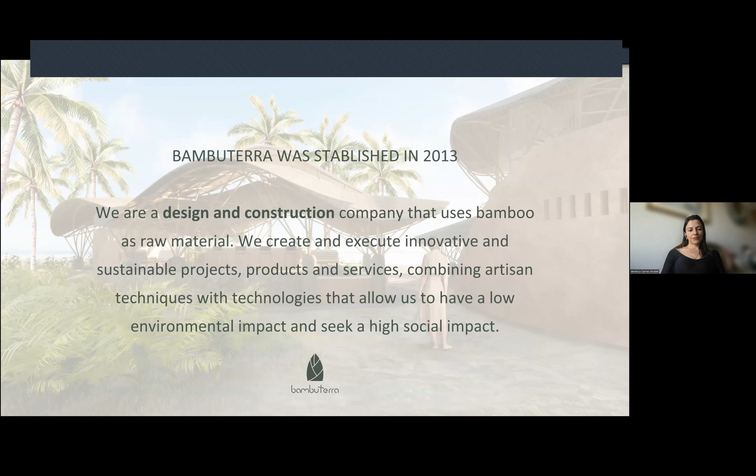So I'm going to show you the result of my experience. We've imagined bamboo culms as systems that can lead to construction and avoid the excessive use of other techniques. So this project introduced us to this.

So we produced this for a festival, and this is basically what we do. We combine architecture and engineering, and we develop blueprints that allow us to design tailor-made connections that also help us with the building process.

This also came from a static idea that was a beautiful one, using bamboo culms in the city of Mexico, where it was built. For this, we had to create some special joints that, based on our practice and on general engineering information, we needed to survey, test, and produce precise engineering for. But of course, this is part of the work we do.

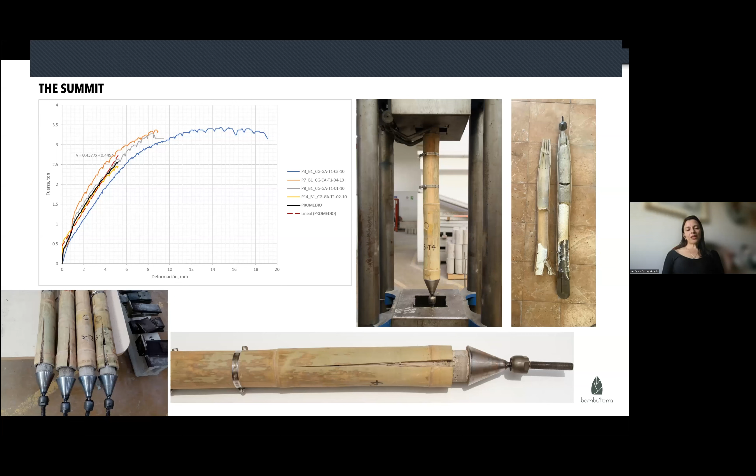And this is applicable for the business world, where most of the things we can see are conventional materials. This also fed our experience, where many culms were required in order to develop this project in a short time, and this also helped us with the assembly. This is a very architectural use, but one that also helped us being trained in the logistics of pre-manufacturing.

Another project that was very challenging for us also had an architectural use, but used a lot of bamboo in order to create this prefabricated plywood that covered over 6,400 meters of interior lining with this coverage.

So we've also worked with housing solutions. This has been done from social housing to residential housing, and we've used prefabricated systems for this as well.

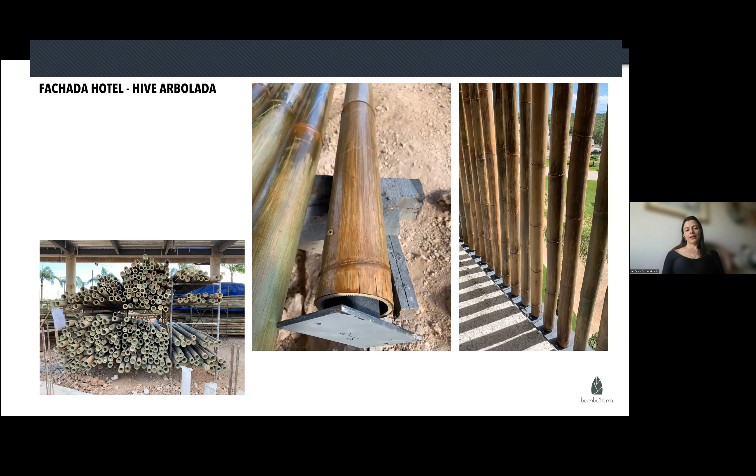This is just another example of one of the products that we are selling. These are the geodesic domes. This is done with bamboo, and this has some metal ends, and this enables us to generate some very effective solutions from a perspective of business processes.

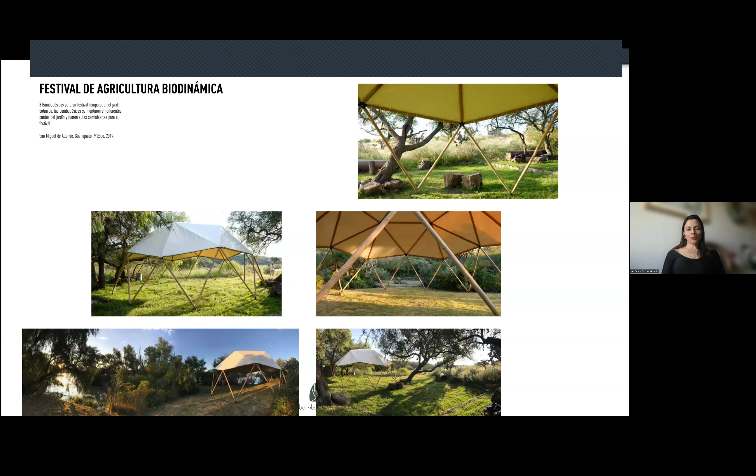And these are some of the processes that we have currently in place. This has been done with scale models. These are some bigger projects. We have evolved with time until we have been able to manufacture these concepts and projects for Mexico, but also for the rest of the world. We believe that this is some of the experience that we've had so far.

I would like now to get into the matter and share a specific project with you. This is a place that was built, a fairground that is currently being built in the city of Chilpancingo, which is the capital of the Guerrero state of Mexico.

So this project is part of a national project for the renewal of public spaces in this country. So far there have been over 1,000 projects, a lot of money has been invested, and 4 of these projects have bamboo. 3 of them have been successful, 1 of them was not, unfortunately.

Why wasn't this one successful? Well, the reason why, and something that's also worth mentioning, is to understand that some bamboo projects are successful while others are not. This was only based on prices, so there were different possibilities for obtaining providers, but we decided to go with the cheapest, and very frequently the cheapest is not the best. The consequences of this led to very poor material, and before the opening of the construction, this material was plagued with insects, and all of it had to be renewed and replaced.

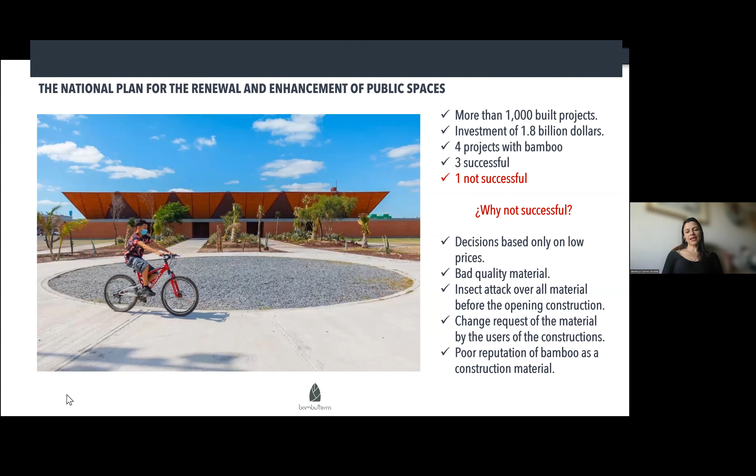This is Palenque, where traditionally cockfighting takes place. We have these 2 pavilions built of bamboo, and I will go in depth about them. These are 2 identical structures. This is the theater of the village, where different plays are shown, and these are also made of bamboo.

There's a combination in Palenque, and here we can see the galerías. These are all galleries, the eastern one and the western one, and they are also built with bamboo. But there are other buildings - this one is a structure that is not made out of bamboo. However, the majority of the new ones include bamboo.

This is about 8,400 meters of construction. This is a diagram of the project. The project was developed by a highly regarded institution in Mexico called MMX.

The structural project for the buildings shown in green, blue, orange, and red was developed by Calta Ingeniería, which is the office that I lead. And the building project for bamboo was developed by Bambuterra and is currently also being executed by Bambuterra. The general management is in charge of the company that won the bidding contest, which is called ABA Gerencia de Proyectos. So let me set the context.

I would like to show you the city of Chilpancingo. From a seismic perspective, this strip in orange is the most seismically active strip of the country. This is an area where the tectonic plates meet and go into the ocean. Thus, this is all highly seismic - we are in one of the most actively seismic areas of the country.

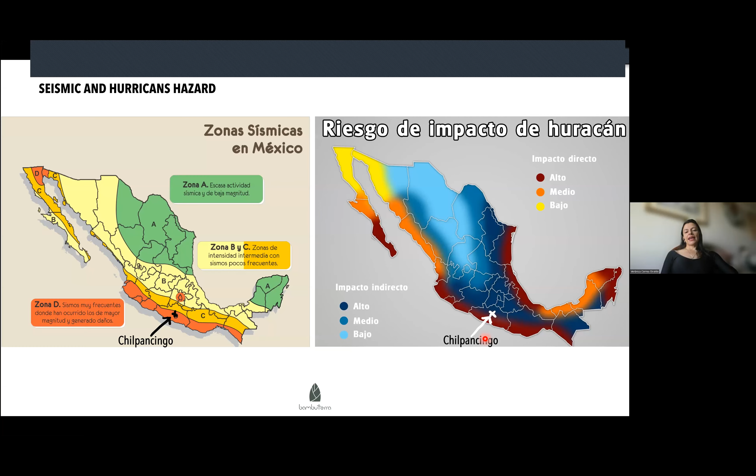There are about 30 very high quality producers that distribute all along the country. Based on the calculations made, we've estimated that there is around 1 million culms per year. So this is the level of supply that we can expect.

Historically, bamboo has been widely used in Mexico. We can see this in vernacular architecture and also in historical documents.

Some of the major challenges that bamboo construction faces in Mexico is about convincing the system. By the system, I'm speaking about the political system. In this case, we're talking about this project, which is made with local resources. So there were 5 aspects that were considered for this project to be developed at this moment.

The first thing that we took into consideration is that we have some prior successful projects of the construction of bamboo. This is also a consequence of everything good that has been done with bamboo around the world. Also, the openness of local Mexican architects who now believe that it's feasible to build large-scale projects with bamboo.

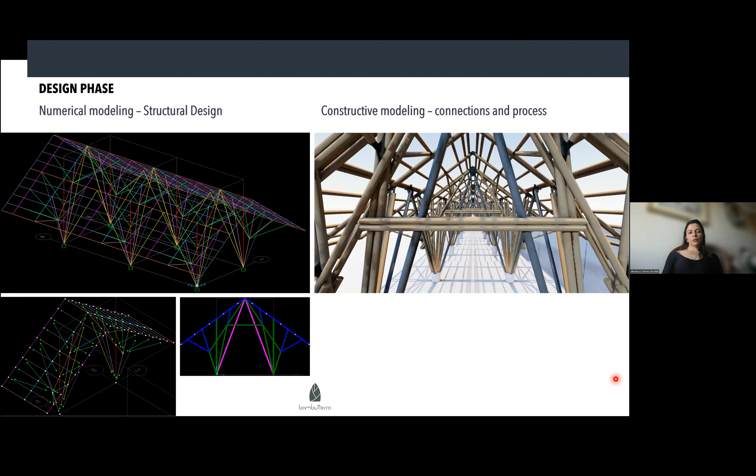Therefore, these structures need to enable, in the case of any natural event, the possibility of serving as refuge for the affected population. We needed to be very careful and include capacity curves for our joints, and through these get direct data about the proposal for the connections or joints we were using in this case.

These are some examples. Let me show you a quick video that showcases the evolution. We can see the single tension test, which was of course carried out in a lab environment. Let me continue.

Let me show you the structures, the pavilions that have an area adding up to about 3,000 square meters. The construction time was 6 months, and they were already built and delivered.

The first thing we did was manufacturing the main structures. Basically, this is what the building process looked like.

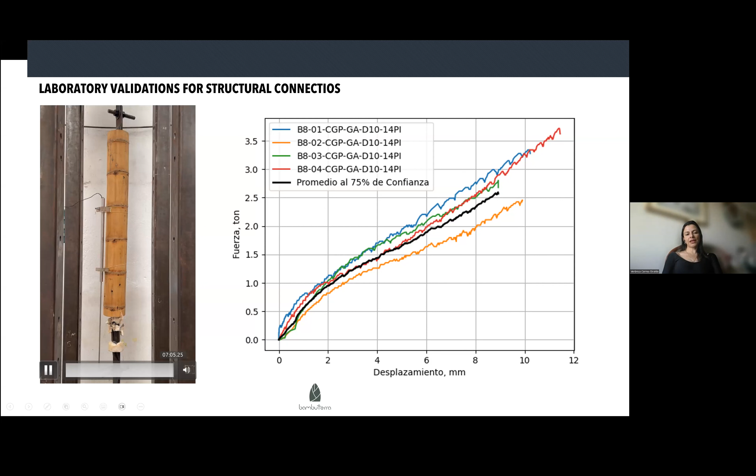After that, we installed the main structures. We started with columns, which were prefabricated as mentioned before, then assembled these frames using a very simple scaffolding system and some specific systems with simple pulleys.

Of course, if this had been built with steel tubes, the building process wouldn't have been as easy or as economical.

Further on, we were able to install these complementary elements to enable this possibility, and we were able to create a very efficient system.

But during the building process, since we didn't have any intermediate columns, we did have some effects of instability, which we were able to counteract because of the construction strategy that we developed.

As part of this construction strategy, we also included some steel elements. However, they were minimal, but they enabled us to stabilize the building process of the bamboo structure, found in almost all the ends and joints.

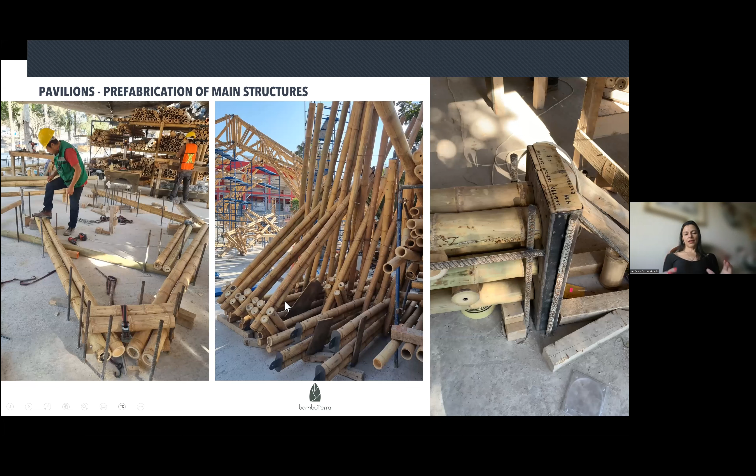But of course, when triangulating and closing all this triangulation, this becomes a very efficient system. We used these two bamboo beams that led to a very proper contribution to the structural performance of these pavilions.

This is a view from the inside. This is a construction model, and this is how it was finally achieved.

So basically, this is what we designed, and what we thought, what we designed was what we built at the end. So we were able to make it.

These are some details about the joints. We can see zooming into some of the important structural joints used in this case.

And this is the finishing phase where we added the details. Of course, in this case, we can no longer see the part before, but we wanted to ensure proper durability during the lifetime of the structure.

The galleries are about 3,000 square meters long. The construction time is 5 months, and we've currently progressed 30%.

We've done a lot of work with the prefabrication of the main structures, and we also used joints that include metal ends, which very easily help us with the construction system.

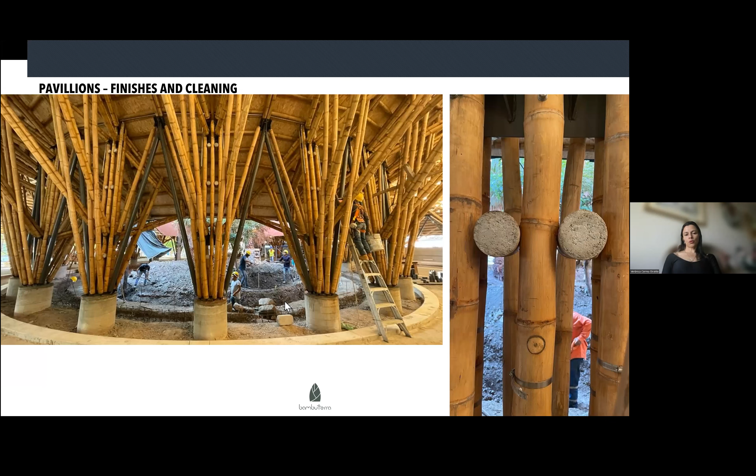And these are processes that make the construction a very long and slow process.

This is how we installed the main structures. Here you can see that we have already mounted the main parts, and this is the current status of the western gallery of this project, and this is where we are now.

So I would like to show you now.

As of course this isn't fully built at the moment, we are waiting for this to arrive. This is where we want to be.

So this is a very long gallery, but of course we've divided it into more modules. And through this, we are able to have better isolation of the structure of this very, very long structure in order to control the lateral deformations that may come up and make building processes much simpler.

And of course, following the topography of the site, which has a certain slope, we use the stairs in order to solve this issue. So these are some of the details related to the joints. They are very precisely modeled.

And as I said before, this building model enables the creation of workshop blueprints that have enough detail in order to pre-manufacture and assemble this in a most efficient way. This includes some steel elements that enable the control of the seismic force.

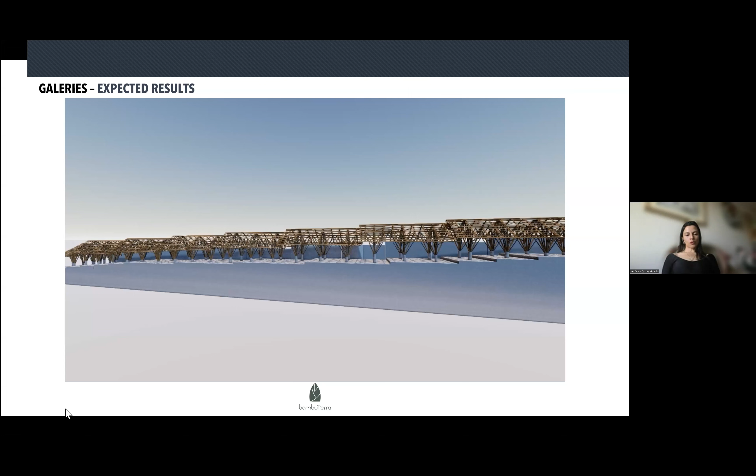And as I said before, we are talking about one of the most seismically active regions of the country. We expect the gravity force, but horizontally, this is part of the seismic forces that affect constructions on this side.

So if you ever go there, you'll be able to see how this looks. If you visit it, this is how you'll see it. This is the structural construction model. There's no architectural ambientation in this case because its goal is to solve the issues related to the processes.

This is Palenque, and this is a hybrid construction made of bamboo and steel. Its area is about 1,600 meters, and it's 50% completed so far.

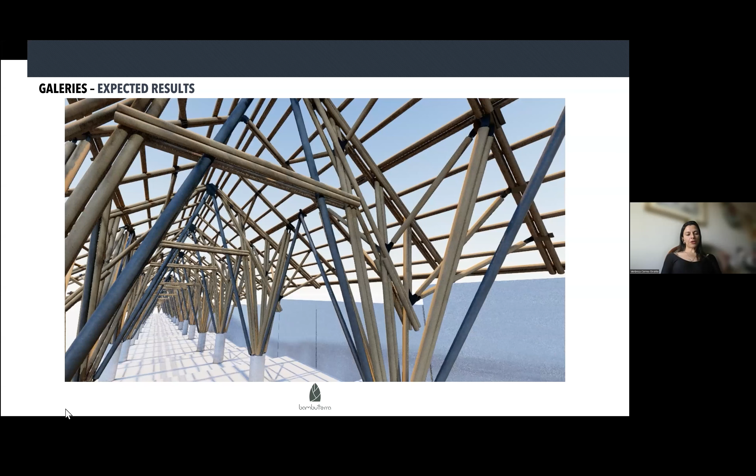So in this case, we combined bamboo and steel, as I said before, and because of this, we were able to reduce the number of columns required for the upper chords of the main frames. We're speaking about 25-meter frames, located in a compression ring towards the inner side, creating a clear space without intermediate support of about 50 meters.

And of course here, you can see some of the tubes we use. They are about 10 centimeters width, and they also use bamboo culms that are between 11 and 12 centimeters. The diagonals are also made out of bamboo.

Here on the inside, you can see how the bull ring looks like. This is safekeeping all the frames. There are 22 frames that make up the main system.

And I would also like to show you at this moment a picture of the construction model, just so you can better understand what we are trying to achieve in this case.

So the main system is made out of tubes of steel, and they have hybrid frames of bamboo that also use steel elements connected to each other. And then all these frames are found in the middle.

As I mentioned before, these are some of the details of the construction of the steel structure. Let me skip ahead just so you can take a look at the bamboo structure we used. So of course, this is the frame which was divided into two sections.

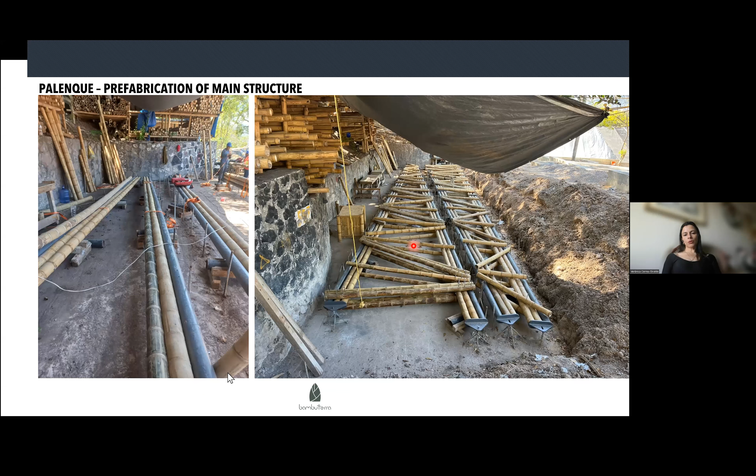You'll be able to find that this is the connection between both frames. Why did we divide them? Well, this is part of the construction procedure that we use in order to avoid having other kinds of structures.

Each one of these frames weighs around 1 ton, and the assembly process will need a tower crane that will allow the hoisting of these frames in order to make this happen, as we can see it on screen now.

I didn't say this before, but the two other structures are lined with mud, and this has been made with plywood. In this case, the lining is lighter, and it uses some prefabricated panels. They have been lightened too, and they facilitate the assembly process because they're panels, of course, as you know.

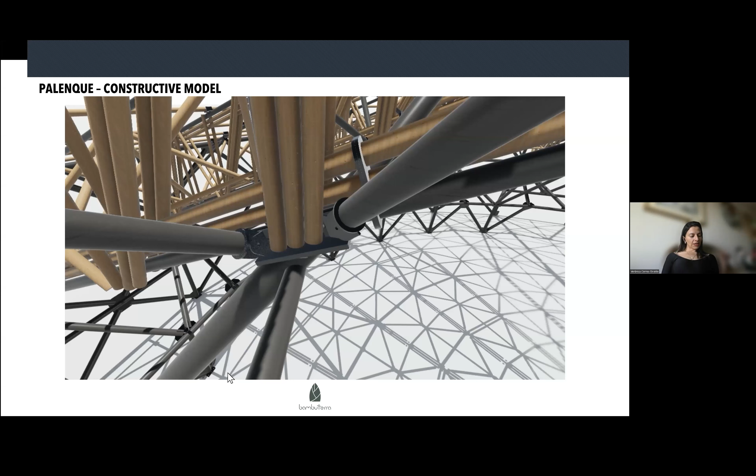So these are some of the details of the connections. So these are the prefabricated panels, as I mentioned before. So this is the inside of the structure. We are talking about 50 meters of a structure, and this is what we can see.

So this is the theater. This is the smallest structure, but this is also the most complex one. If you take a look, you can see the curved elements, but this was part of the architecture conception that we transformed into straight elements because of the urgent needs for the delivery of this work.

Now we are currently prefabricating this. This is one of the workshops where we've prefabricated this, and this is where we are adding some of the elements. And of course, we can see the construction model of the theater.

And as you can see, there are no longer any curved elements. Everything is straight in this case. And you can also see the integration of some tubes made out of steel, in order to comply with the needs, specifically from a seismic perspective for this structure.

This is the most asymmetric of them all, and it also has a lining made out of shingles. This is a very heavy lining or cover, so it does require more complementary elements.

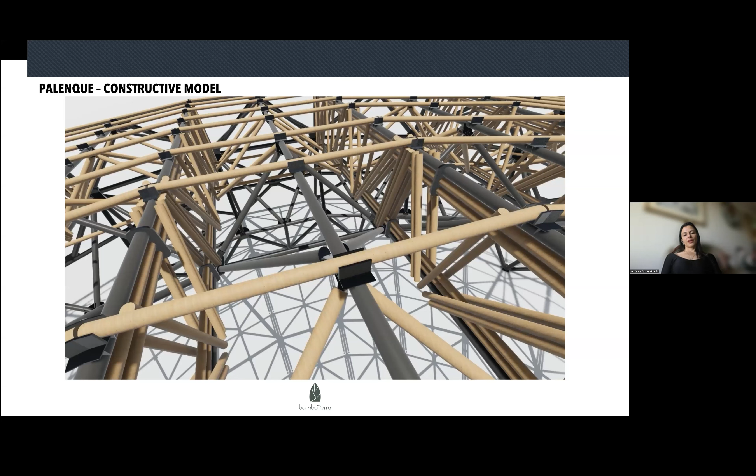In addition, all the cuts in this structure are straight, and this facilitates the building process for us. This is the smallest structure of all, with 600 square meters of covered area. These are some of the indicators and results of the work we've done. The carbon footprint is very low versus other projects made with commercially available materials, and we've achieved strong social impact from a quality perspective.

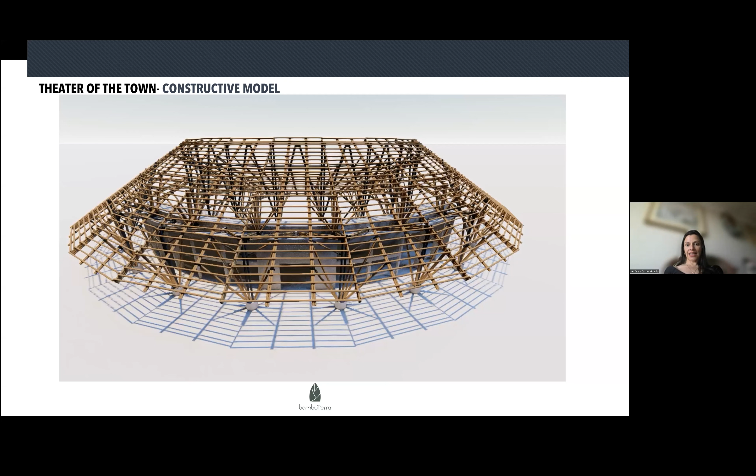We've had the specialization of dedicated labor. Currently we have leaders and builders who are now specialized in bamboo construction. Some of these workers have been with us for many years, others have worked with colleagues on projects of this size, and they've had between 6 and 7 years of experience building with bamboo. But we've also trained around 60 people who didn't have any prior experience with bamboo building, and now they have this experience. This represents a lot of progress for the bamboo building sector in Mexico.

We've acquired around 15,000 culms in Mexico from over 10 producers, and we've created technical documents focused on the creation of this. We're also going to write 2 articles related to the connections for seismic applications. We have a training plan for students and professionals based on guided visits and techniques, which we've done with universities, including engineers, architects, and the construction guild. This will help a lot of people understand the construction process leading to the final result. We're also writing a book and a documentary course to complement and foster the information created on this project.

On behalf of Bambuterra, I would like to deeply thank the team that has directly participated with us on this project, including the design team and the labor team, but also the guild, all the people who work with bamboo, because of whom we have a greater background in the world. Without this information, this process wouldn't have happened. We feel very happy and proud to share this work with you. Thank you very much. This is our social media and our email. If you have any doubts or questions, please reach out.

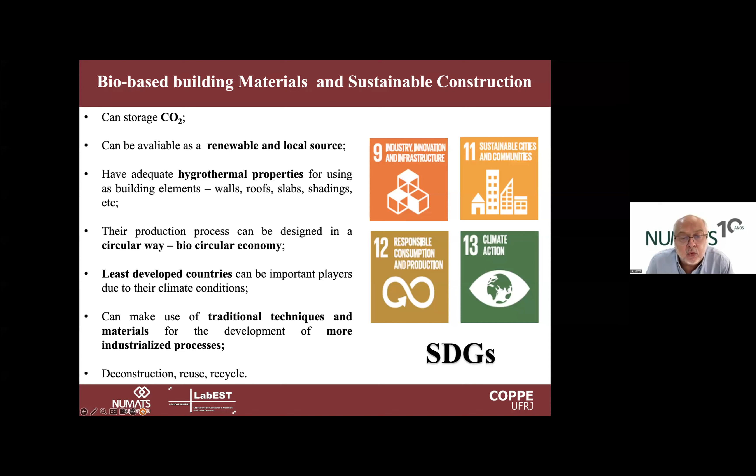We are also starting to develop here in Brazil bamboo laminated materials, so it's not industrialized yet, we are developing solutions in our lab. These materials are in accordance with many of the SDGs, so they can be reused or even deconstructed. Deconstruction is something very interesting, and we need to take advantage of using bio-based materials to do that. We also have here in developing countries many kinds of biomass, bio-based materials, so it's very important that we develop the economy based on these materials.

From the solutions we are studying, the first one was the use of vegetable fibers. In this case, the volume of bio-based material is not that high. Normally we use short fibers or textile, so typically the volume fraction ranges from 2 to 10%, no more than that. This is the normal use we do.

Recently we started to use waste from agriculture, different kinds of waste from wood production, waste from husk production, and from sugarcane, the waste from electricity generation. After the bioenergy is produced, we have ethanol and then bioelectricity, and the waste is rich in silica, so we use it as cement replacement. These bioaggregates replace mineral aggregate to produce materials very rich in biomass. We can reach up to 70% biomass, giving materials that are good insulators and lightweight, with many interesting applications.

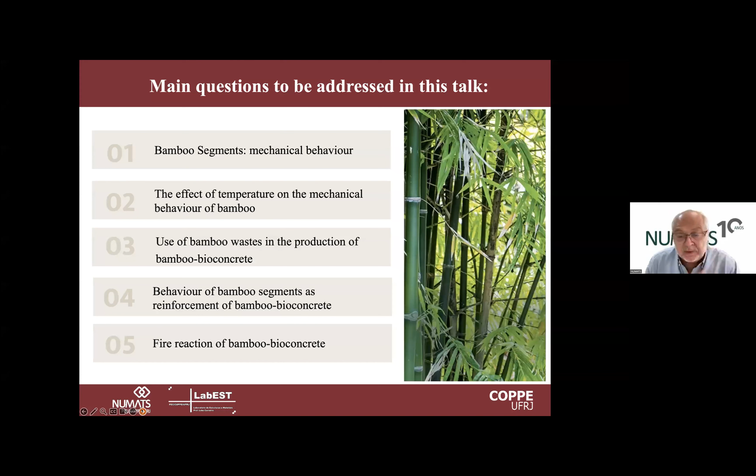So just starting, bamboo is a functionally graded material. Normally, when we take strips of bamboo closer to the outer side, we take it from a part where it has higher mechanical properties because it has higher fiber concentration and more holocellulose. The density is higher in the outer part of the bamboo, so bamboo is a naturally functionally graded material.

So what we did here was to take strips from the part where we have a higher concentration of fibers, typically around 55% of fibers in this region. Normally the fibers are all aligned. Then in the inner part, the concentration decreased to 40%, and this changed the properties of the strip. Also, the presence of nodes influences the response of this material under direct tension and under bending loads.

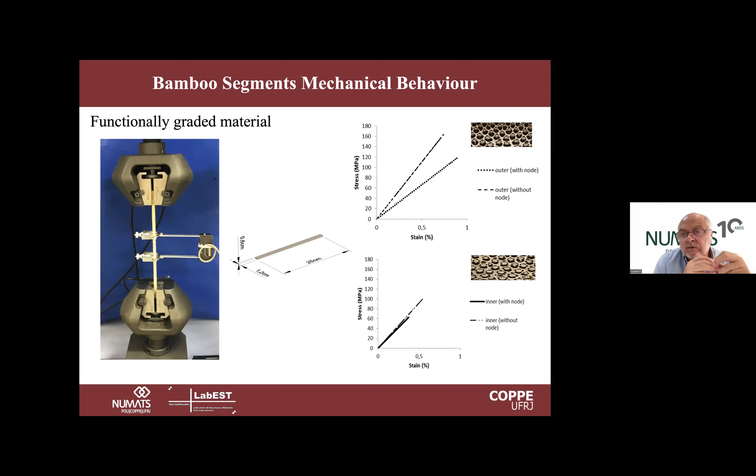So what we did here is look at the presence of nodes. In general, it reduces a bit the elastic modulus and the tensile strength of the bamboo strip, both when they are taken from the outer part and from the inner part. Those taken from the outer part have about 20-25% more strength because it has more reinforcement.

So the influence of the number of nodes - the nodes work like natural defects because we have disalignment of fibers in this region. So when we put it under direct tension, we looked at the influence of one or two nodes. We did the test also in longer strips because this is how we are going to use it. Normally it is going to have many nodes along the strip when we think about a structural use.

And we did a test with no nodes, just using the internodal length, then with one node in the center, and then with two nodes. What we saw here was that there is a slight decrease when we go from 1 to 2 nodes. But the main reduction is with the presence of one possible source of defect where we initiate the failure.

In terms of the temperature effects on the mechanical behavior of bamboo, we did first a thermogravimetric analysis to show the stability of bamboo. Normally, when we dry bamboo up to 100, 150 C, we lose only moisture. After that, after 160, from the thermogravimetric mass loss curve, we see that some active pyrolysis stage starts. So we start to decompose hemicellulose, cellulose, and lignin. This process is nearly complete when we are in the temperature range of 380 C, but intensive mass loss starts from about 250 C.

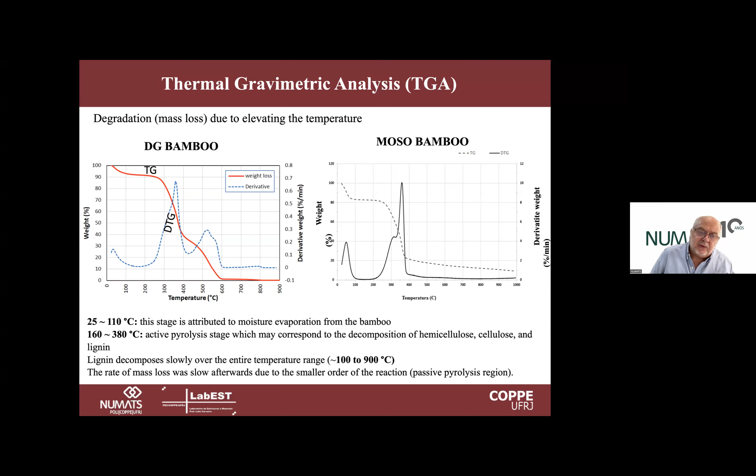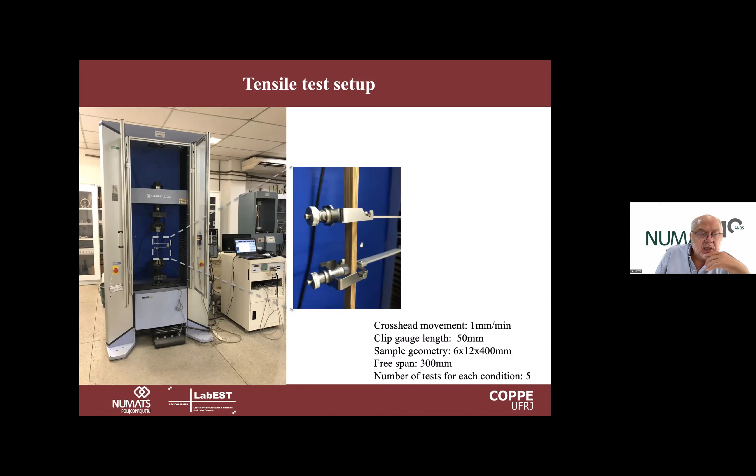So what we did here was to take some of these strips and put them in an oven. Samples were all at equilibrium humidity when we started, so humidity wasn't a variable. We did different residence times and different temperatures from 100 C, 150, 200, and 250 C to see the response of these materials when we increase the temperature and also the residence time. Then we did the test afterward in a 300 millimeter free span using a clip gauge to detect the extension and calculate the elastic modulus as well.

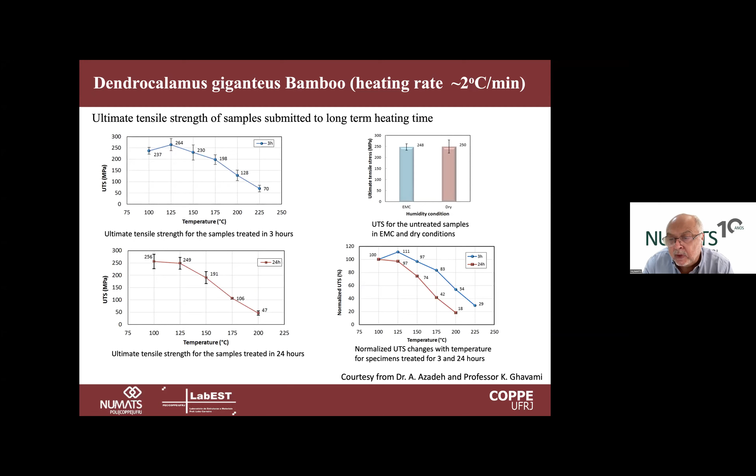When we leave it for a longer time, we even lose more strength. This is mainly because of the decomposition of the material—the filaments are not together anymore, so the stress transfer cannot be made. The material works like this: when we break one filament, one fiber of bamboo, the process of fracture starts, and that's the main mechanism of the failure pattern—the loss of adhesion between the filaments of the fiber bundle of bamboo.

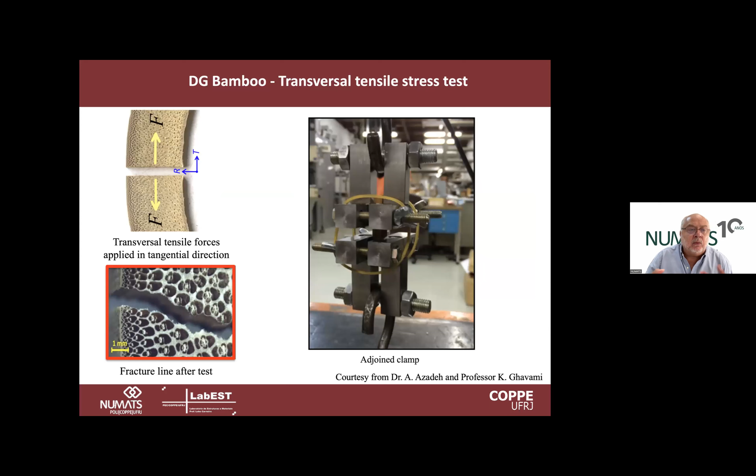We also did this test in the transverse direction, just to give an idea about the tensile strength when we test it in the direction where we have nearly no fiber. So this is the matrix strength, and we have only 5%, but the mechanism is the same. The matrix is mainly lignin and pectin, and after 150 C we start to see a strong decrease in strength. But if we compare the transverse tensile strength with the direct tensile strength, it's about 30 times less in the transverse direction.

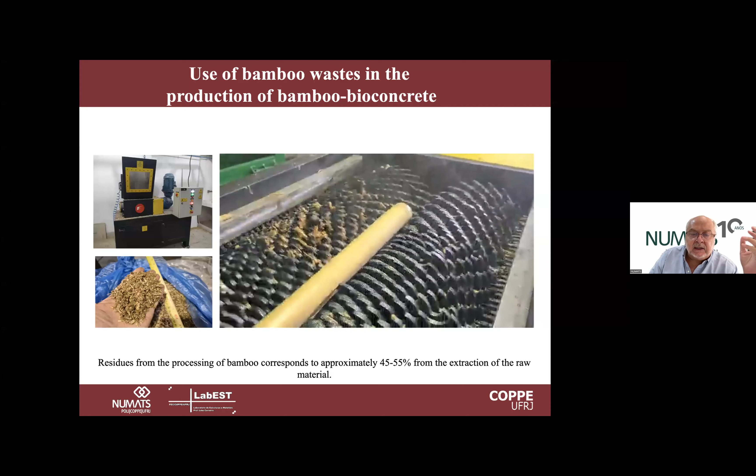The idea of using bamboo as aggregate was also because when we studied the lamination or even the culms, we lose a lot of parts—between 45 and 55% is sometimes lost. So what we did was crush it to produce bioaggregate, using an industrial mill. We produce a kind of fibrous material that we classify into fine and coarser particles, but the morphology is always elongated fiber, with about 8 to 10 times aspect ratio—the length of this crushed culm is about 8 times longer than the typical cross-section dimension. If we grind a lot, it becomes more circular, but otherwise it has like a 2D cross-section. The density of this material is around 600 kilograms per cubic meter.

We also determined the water absorption because we need to compensate for this water in the mix design. The extractives that come with bamboo can affect the hydration of the cementitious matrix, giving a certain delaying effect in the hydration.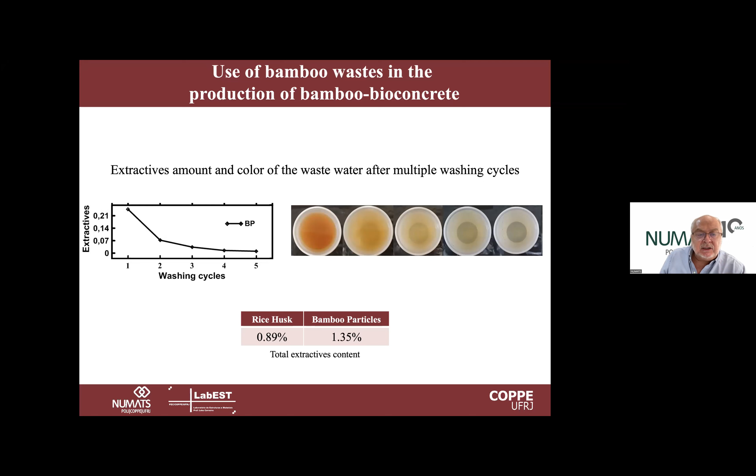So we studied washing this material or doing some filtration using nano filters, and we also used some chlorides to increase the velocity and recover the hydration reaction. Bamboo is not a big problem, but it has some delay. We see here that if no treatment is given, the hydration is delayed by 1-2 hours, and the peak of the heat of hydration is also reduced. When we use filtered water, with nanofiltration or reverse osmosis, we can solve this problem, bringing the material to very much the same performance, or even better, when we use some accelerators compared to the normal cement matrix.

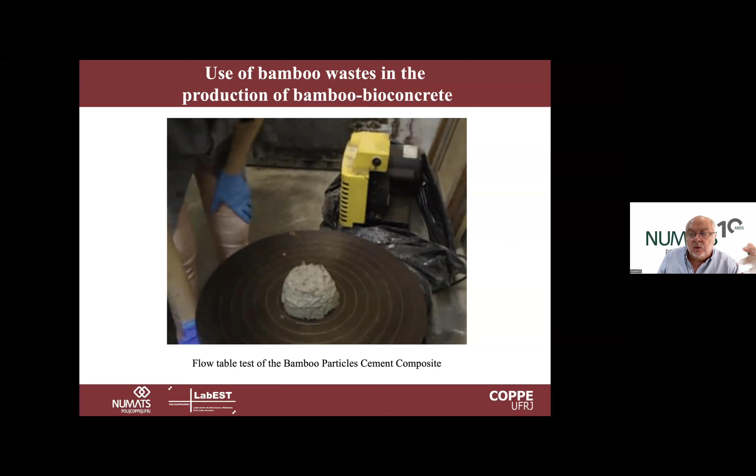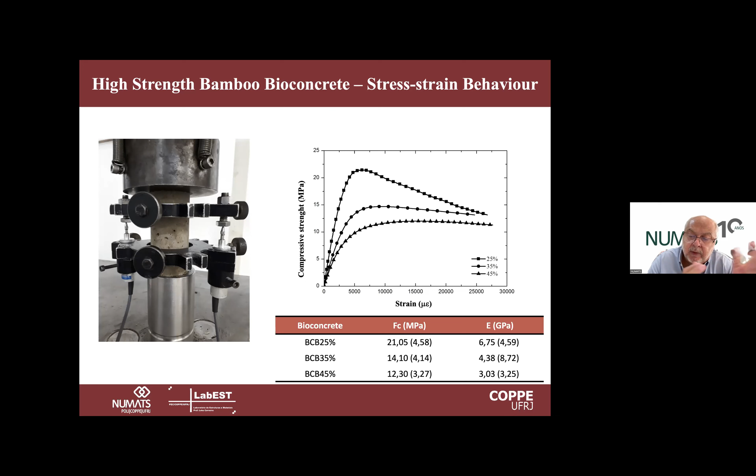Both materials we use are from bioash—we're using rice husk ash or metakaolin to replace cement in this proportion. We see here that a good compromise is already obtained when we replace between 40 to 50% of cement by supplementary cementitious materials. In this case, we keep the elastic modulus in the range of 3 gigapascals, compressive strength in the range of 15 MPa, using 40% biomass. If we reduce the biomass content to 35 or 25%, we can reach up to 20 MPa compressive strength, and have an elastic modulus in the range of 6 to 7 GPa.

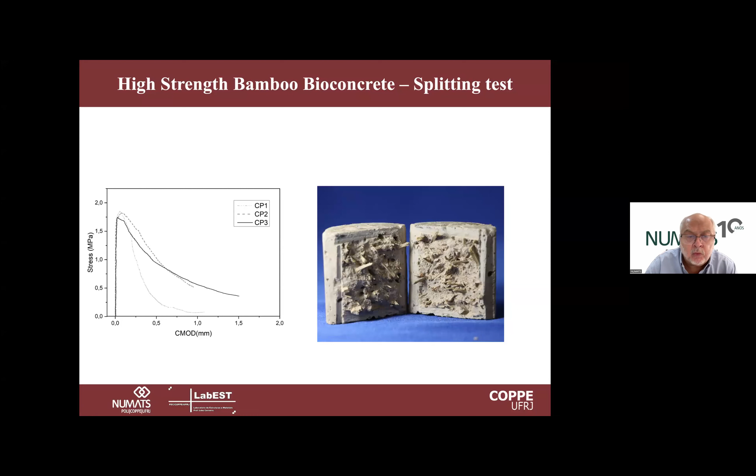We also did tests under indirect tension to see the fracture energy of this material, and also to determine the bridge effect that these filaments can promote. We see the post-cracking zone, the effect of the bamboo filaments working to control the crack opening under indirect tension and also under direct tension. The tensile strength can be in the range of 1 MPa, and under indirect loads, it can go up to 1.5 MPa.

A very interesting property of this material is that we can achieve low density. The density here can be as low as 750 kilograms per cubic meter, and the thermal conductivity is quite low, which can also be good for the thermal efficiency of buildings using these materials.

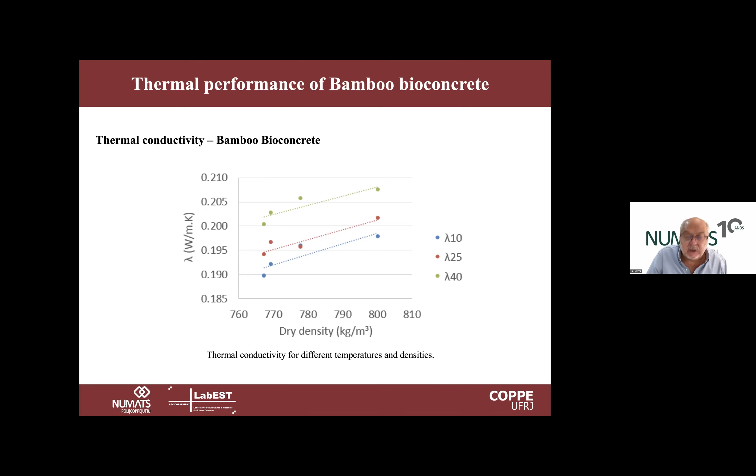We are now studying the use of ultralight materials. The density here is in the range of 100 to 120 kilogram per cubic meter. These materials can be used as isolator and also to produce a sandwich system using outer layers with textile or short fiber reinforced cement matrix. So we can produce sandwich panels and develop construction systems using these materials.

Coming to the use of segments as reinforcement of bioconcrete now. The first test we did was the bonding test. Normally the pull out of these strips from the bioconcrete can be very low if we do not use any kind of polymeric coating, so we are using both a natural biopolymer as coating, and also a castor oil biopolymer, and a commercial epoxy resin. We also saw the influence of using sand, fine or coarse, to improve the roughness and adhesion between the two materials.

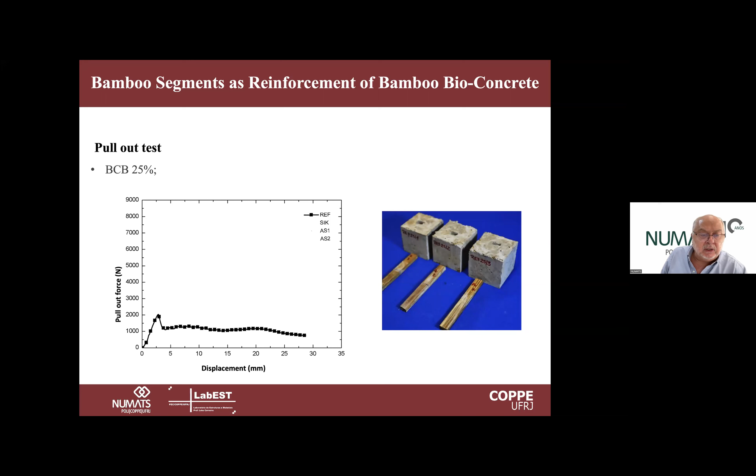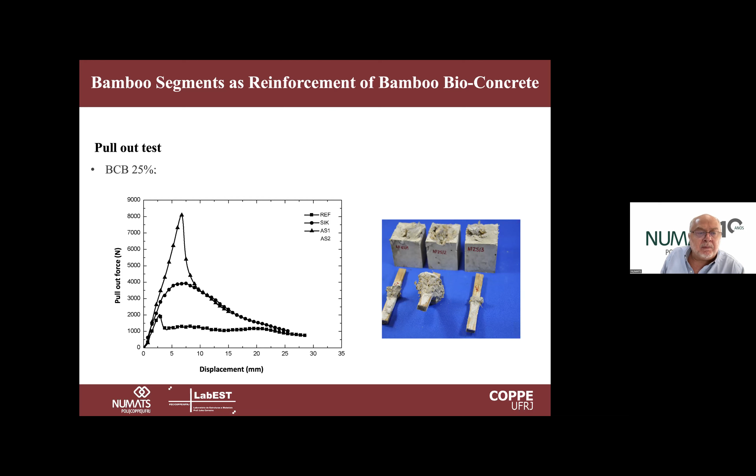So it's a very critical part, the stress transfer. When we do not have any kind of treatment, the pull-out force is relatively low and we do not mobilize much frictional load during pulling out, but just using some polymer - the commercial epoxy-based polymer - we more than double the pull-out force, and the energy is also much higher. When we use sand, the behavior is 4 times better than the non-treated reference. We have much higher load, and the displacement up to this load is quite stiff. The curve shows we can control the cracking process development in the composite system. There is no much difference between fine or coarse sand, both behave well.

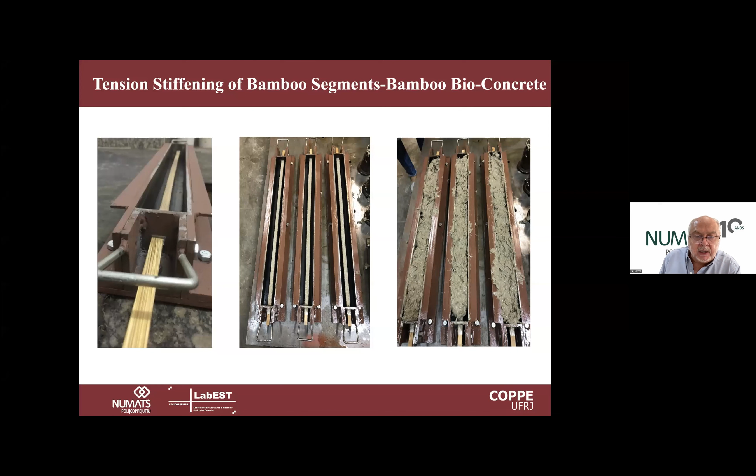Then, coming to the structural behavior, we did some tension stiffening tests. We put one strip of bamboo inside the bioconcrete, then tensioned the element, and observed the crack formation. This gives us the tension stiffening mechanism. When we put in bioconcrete from 25 to 45% of biomass, it doesn't change much, but mainly all of them show very fine cracks, very well distributed cracking process. You can observe the 4 faces of the element.

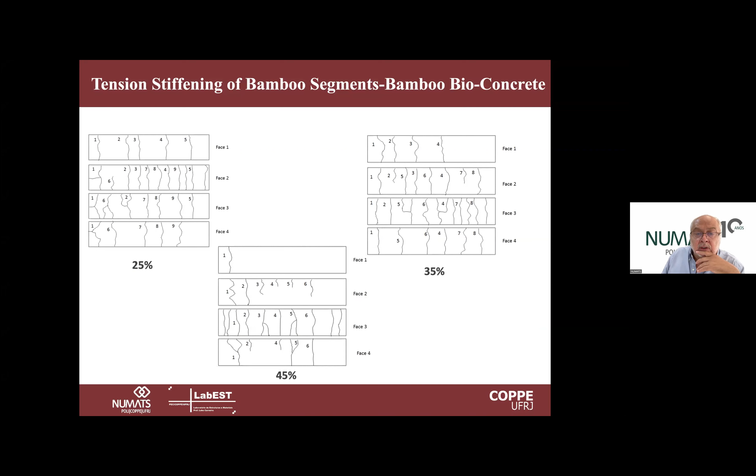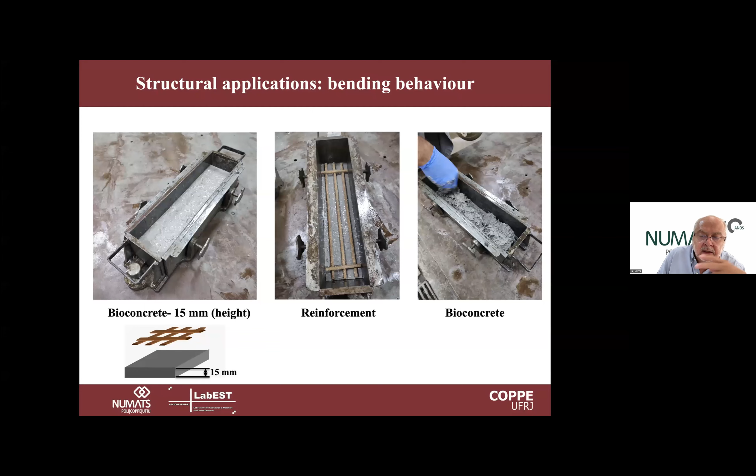This brings us to the last part of the structural application, the use of untreated and treated reinforcement, now using a number of strips as reinforcement. Along the height, in the back of the sample, we put 3 strips of bamboo, then the bioconcrete, and then we test them under bending.

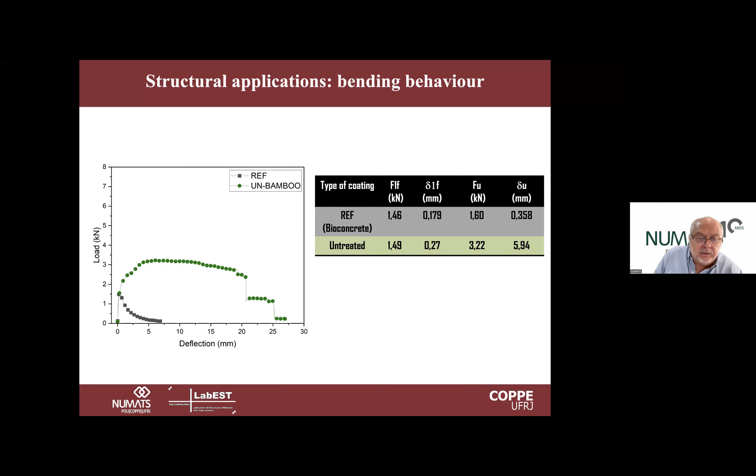We see here that when we do not have any reinforcement, just the matrix, the material is quite brittle, with just post-cracking failure given by the small particles of bamboo. But when we have this strip, even untreated, it can more than double and give very high energy already, and the behavior is much better when we use the treated sample.

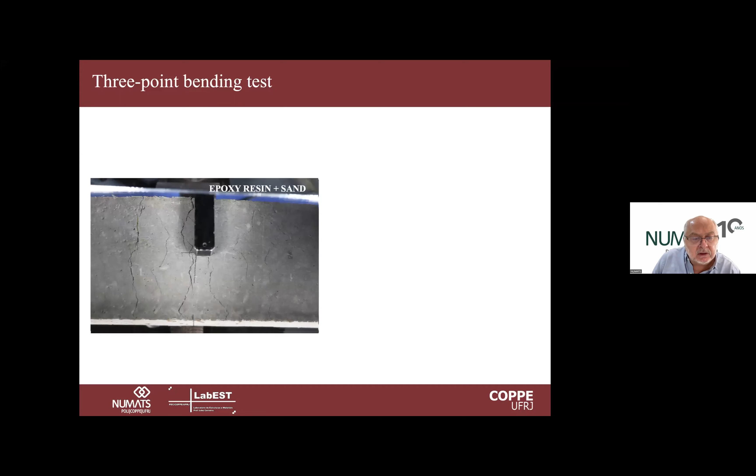Here we have a very nice response, which gives us optimism to design these materials for many possibilities of structural and building systems. You see here the failure mode: when we do not have reinforcement, just fibers in the bioconcrete, the bridging effect is quite reduced and we form only one crack. With untreated bamboo, we have some slip between the bamboo and the bioconcrete at a late stage of the bending process. But when we use the treated segments, we see multiple cracking formation with a controlled cracking process. This gives us a very optimistic view of the use of bamboo as reinforcement of bioconcrete.

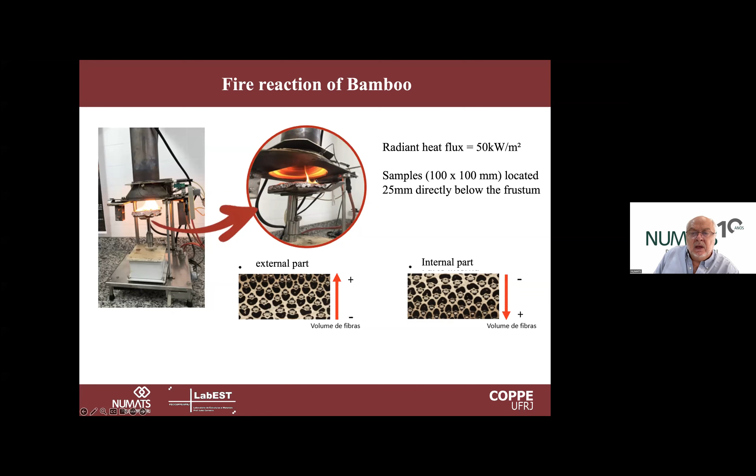So in terms of fire reaction, we use the cone calorimetry test. We did both ways, using also the effect of the bamboo being a functionally graded material. Sometimes we expose the internal part or external part to the radiant flux, and then we see how this material behaves under this heat. After a certain time, the bamboo ignites and gets flammability, both when the inner or the outer part is exposed to the radiant flux.

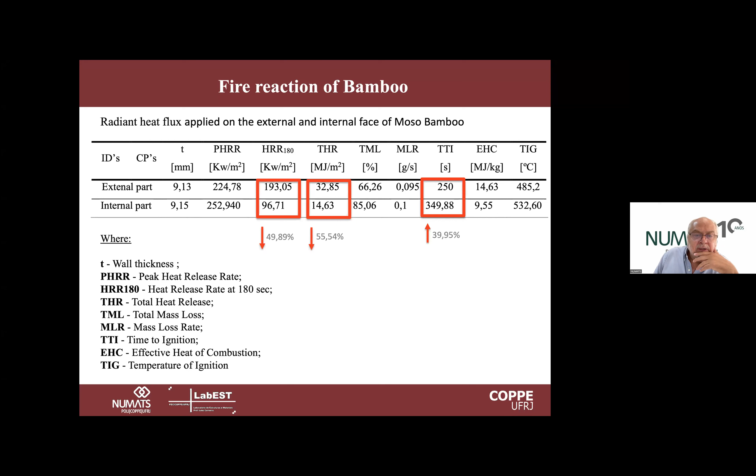From this test we get many properties, but the most important one I put here is the heat release rate. This is very important - if the material releases heat very fast, the time to ignite is low. So we should protect this material with a layer of some fire retardant. In our case, as this bamboo is going to be used inside bioconcrete, we did a study to see the effect of the covering layer of the strips, to determine the minimum covering we need to protect the system.

The inorganic matrix already protects the biomass itself from the flux, even using up to 85% of biomass. The inorganic binding can protect against the flammability.

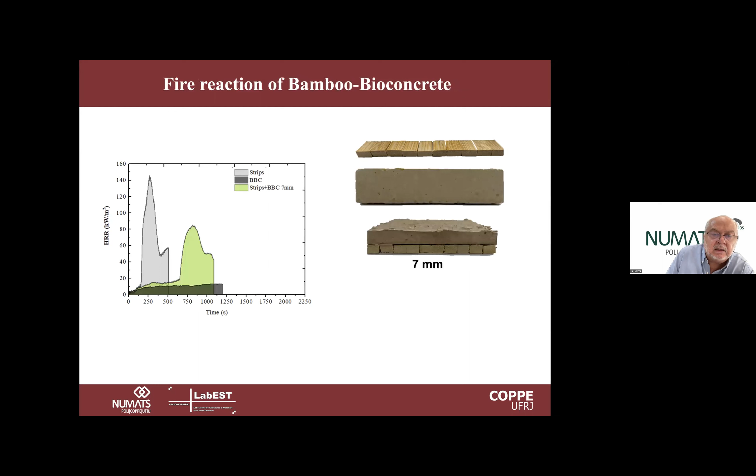And then with bamboo it's very low, and then 7 millimeter, 11, and 15. With 15, we come back nearly to the same situation where we have no strips of bamboo. So protection is total. See here we have the total mass loss.

Sorry, Romildo, you have a minute. Yeah, sorry, Romildo, sorry for interrupting. Yeah, please. Yeah, thank you.

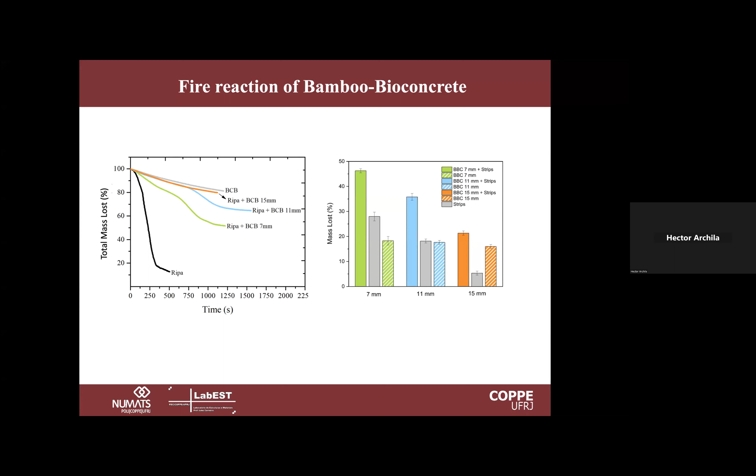So this shows the difference between the bamboo and the strip itself, and then it shows us just a picture here. When we have the 15 millimeters, the bamboo remains very much the same.

Then we put thermocouples to see the temperature close here, and then we see that when we have 15 millimeters, the temperature that reaches the bamboo is between 105 and 170. We saw already that this is enough to keep the properties of the material.

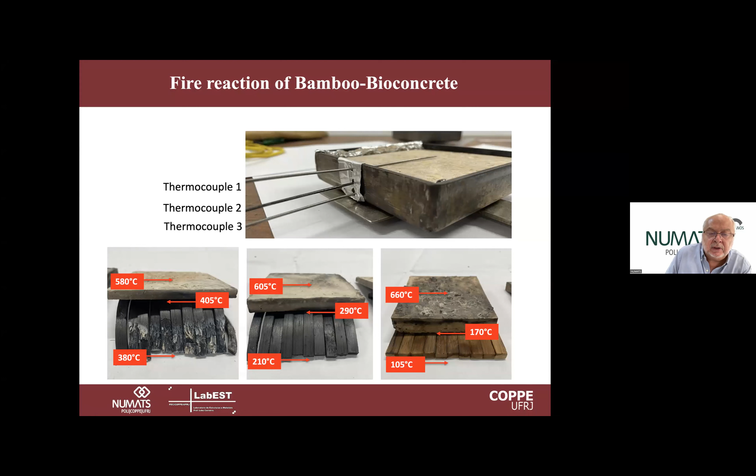So to conclude, just in the last minute, we see that we need to assure a proper adhesion, and that using resin can be a good way to improve that, especially when we put some sand together. Good structural performance with multiple crack formation can be observed. And of course, with 15 millimeters of covering, we protect the material completely against fire.

Now we are working with life cycle assessment and BIM to design optimized, low emission and energy efficient systems. This is part of the group. Part of this group is working on this subject, but many of the others are working on the other topics I mentioned before. Thank you very much, and it was a pleasure to show the results we are developing here in our group. Thank you very much.

Thank you very much, Professor Romildo. It's very, very interesting. I hope we have enough time at the end because I got many questions, because we've been doing some work also on reinforced bamboo reinforced concrete.

So I'll pass over now to my colleague Pablo. I hope his problems with the mic are all solved. Aló, aló, ¿sí? Héctor, ¿me escuchan? Hola, Pablo. Hola. Sí, perfecto. Bueno, muchas gracias. Well, can you hear me now? Fantastic. Good morning, everybody. Good afternoon. Good evening for everyone who is participating. I apologize for the previous presentation, we were experiencing some technical issues.

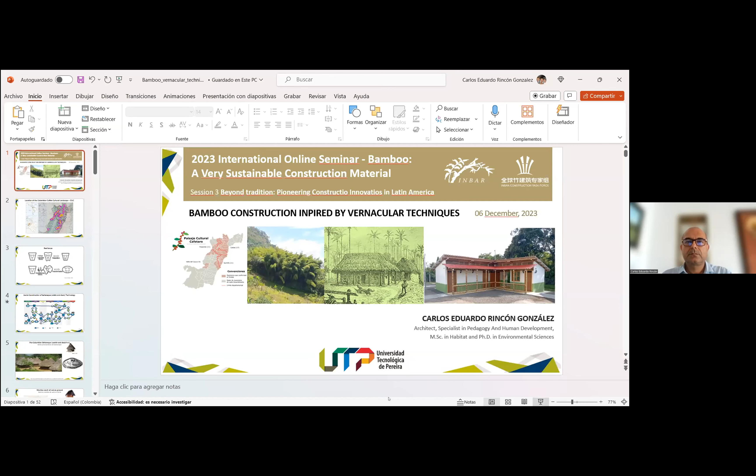With no further ado, just like Pablo mentioned, part of my presentation today is based on my PhD thesis, which was focused on the coffee landscape of Colombia, in the center-west of our country.

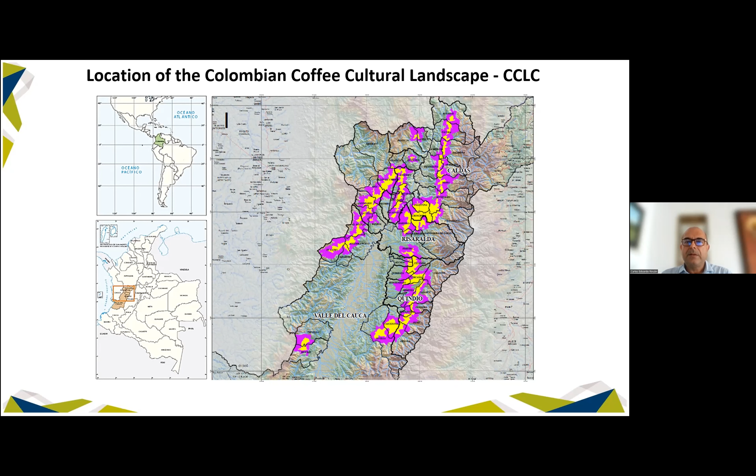Just a second, I was trying to use the pointer but it doesn't seem to be working. But either way, we can see your mouse arrow, Carlos, so that's good enough. All right, so I'll do it with my mouse.

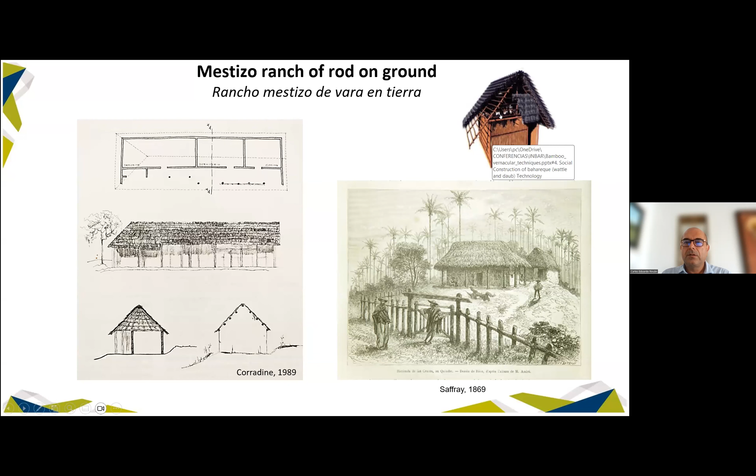So with these typologies, we can see a house in Cocora, in Quindío, one of the best known places of this landscape, with the national palm trees. Basically this is a very simple construction system where four posts are placed on the ground. Then we build a door and create the cover for it.

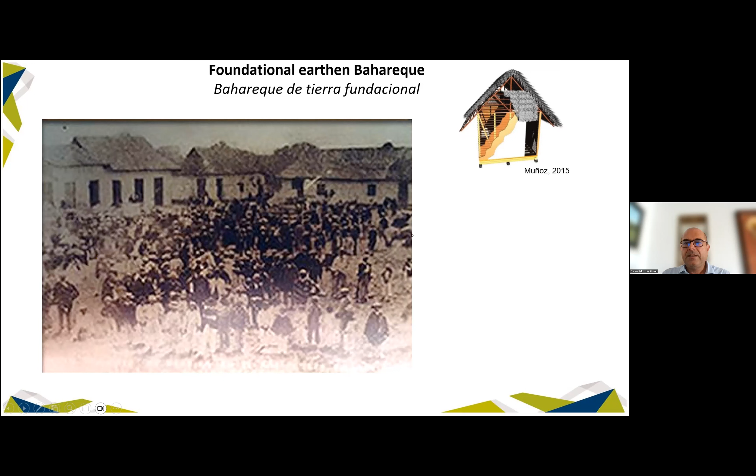Let me go back now. So after this, the foundation bahareque technique was created, and the innovation in this case is using a foundation that enables wood or guadua not to be anchored to the ground, so wear and tear decreases. This is a picture of the plaza, a very old picture where we can see the houses made out of this.

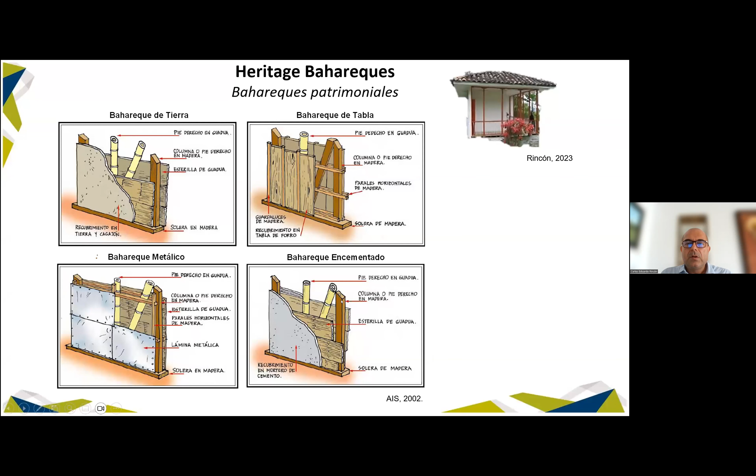After another disturbance, which is fires, we created the cemented bahareque, which included the first instance of recovering the material. But there was a style process that included fashion innovation with the influence of the so-called Republican architecture. So walls are no longer made of soil as they were in the past; there's also the use of cement. With this we're able to answer to the prior two elements, but there's also a regression species, which is intervened bareque, because this also combines some unwanted techniques.

We can show this technique, but whenever there's an earthquake, as the material is different, there is an issue, because this structure can be done with bareque, and it can be anchored to it. And as I said, this is unwanted.

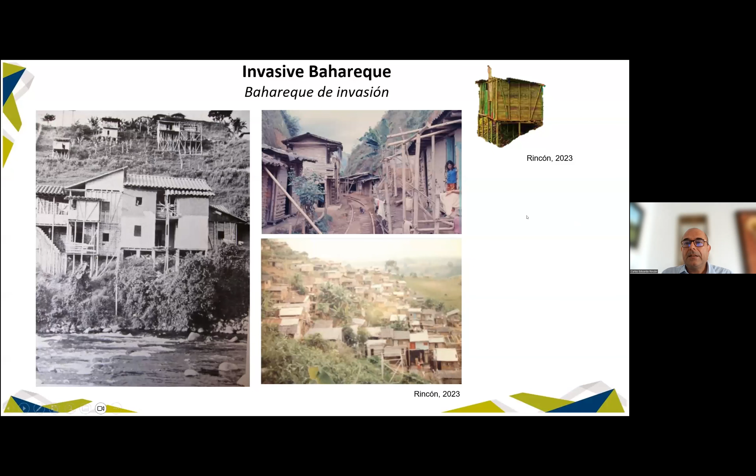So this showcases that this material is very adaptable. We need to take this back. So there's a stigma.

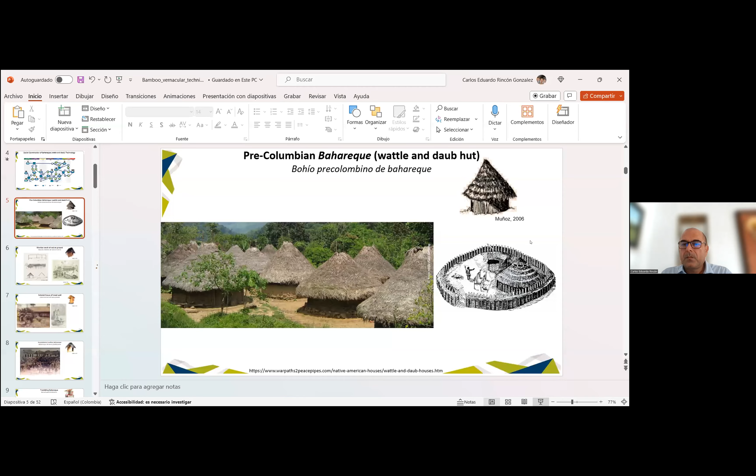This is because of the earthquake. This happened in 1999. So people realized that bahareque houses one and two stories high had a very good behavior, while other types of houses weren't as good. So they started requesting the use of bareque, and when rebuilding the city, a decree was issued and added to the construction code, and this includes the regulation for building houses with cement and bareque.

So with this technology, a recent project that we were able to do with some Swiss cooperation resources and with the cooperation of FEDEGUADUA, which is the guild of Guadua in Colombia, there are people associated to this in other parts of the world. So different designs and different actions were created in order to strengthen the value chain. We had other allies in this case, including INBAR.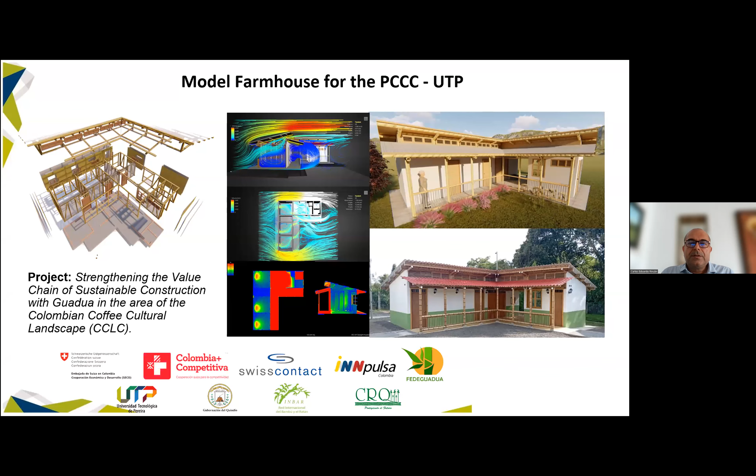And one of the products was the creation of studies for creating housing with bahareque. And finally, a prototype was built at the Technological University of Pereira, known as La Casa Campesina, a peasant house. And this is a render view of the house itself.

This is done together with a different building. This was done later on, and this somehow emulates the expectations in these farms. We also introduced some specifics, for example, the possibility of adapting to other conditions and preferences of the user.

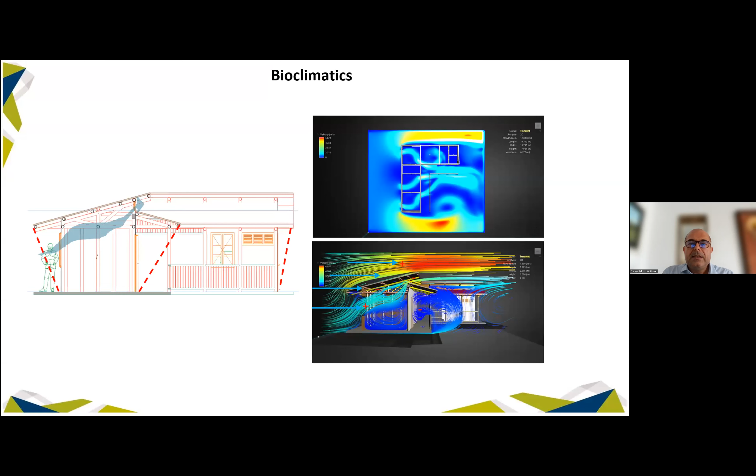It was enabled by the Ministry of Agriculture, and we proposed a relatively simple system called Tangrama, so that people could use available spaces in order to determine these houses. There were also studies carried out for the management of this, and here we can see the variables for the studies of wind, the sun effect, and also the percentages of natural lighting. This is of course related to this being sustainable.

And this answers to a current perspective of learning about vernacular architecture. This is a 3-year research done in Europe. It's called Versus, and this is an important reference where we are able to understand that when deriving knowledge from vernacular architecture, this can also be used in neo-vernacular or contemporary architecture.

These are the structural blueprints of the house. We can see the presence of biomaterials such as guadua and others. In the case of Colombia, this is very particular because we don't use raw material, because there has always been a recovery over this.

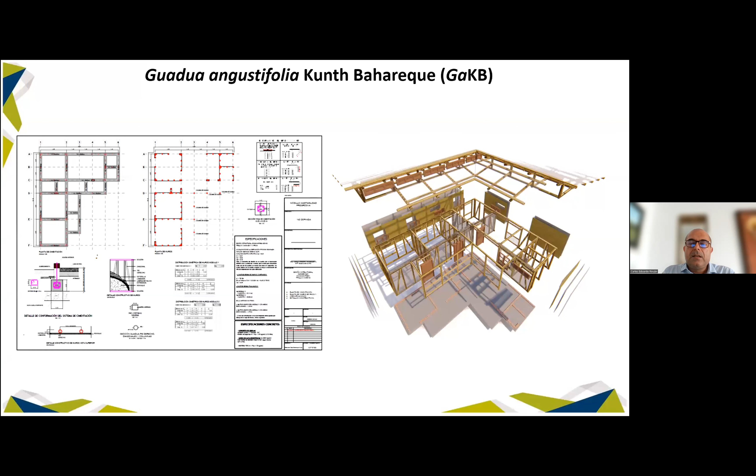So this is done, and we whiten the walls and we do this for the community. This is of course covered with lime, and this is related to the stigma that I mentioned before, where we try to cover what is not considered the so-called noble materials, such as stone or others.

This is part of the building sequence, and we would like to show it because you will not be able to see it later when we see the finishing, only on the structures. So here we can see how this was covered with cane. They call this esterilla in Colombia and caña picada in Ecuador.

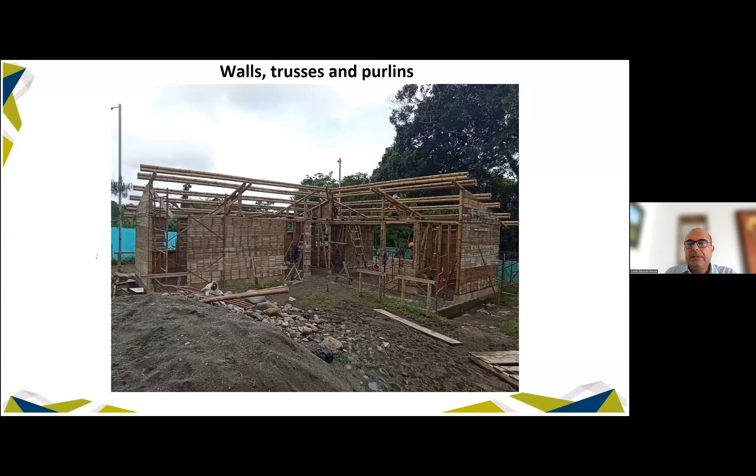And of course, this is a panoramic look of how this house looks. As you can see in the corridor, we wanted the guadua to be visible. This is specifically in order to showcase that we are using it intentionally. Also here, we left these windows because of our weather that requires this recovery. So we kept this. This is also done with guadua.

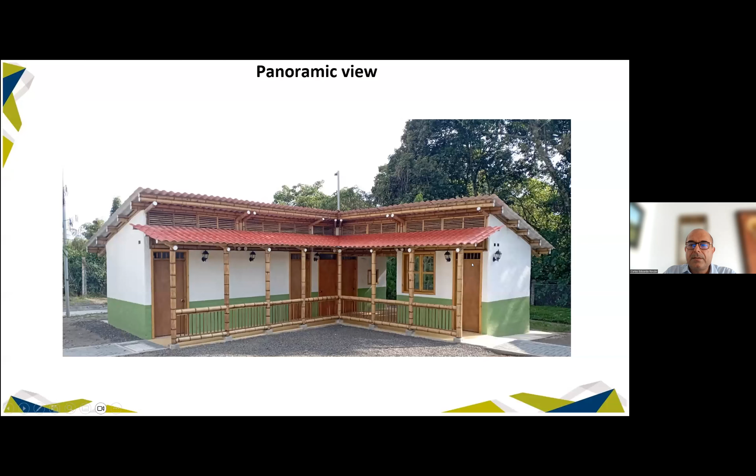And some of the main structures is made with guadua, while the doors are made with pine.

And this space is called a witness, and it shows all the building sequence that led to this product, which is one where students come to. It also includes decision makers, and this allows them to feel, to go through, and to value these vernacular techniques used in this case.

Part of the work we did on the Fedeguadua project, which was systematized in one of the chapters of my thesis, is a comparison of the carbon footprint using a life cycle analysis. This is the life cycle analysis methodology that I'm going to share with you right away.

So in this case, we carried out a comparative study considering a typology of conventional housing, which we can see on the left. This is made with clay bricks, so this is an urban house. Until 2015, these houses were built in the place where we're building, and they use the same materials.

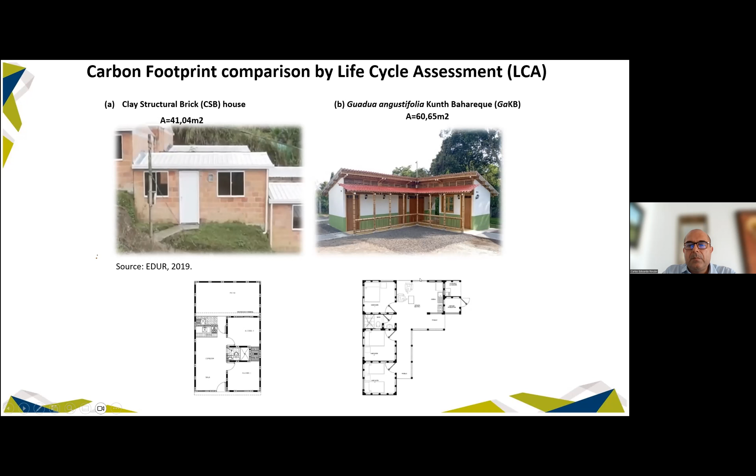So here we put together the analysis for this. This is the sequence for our methodology: the definition of the goal and the scope, the analysis of the inventory, the impact assessment, the interpretation of the results, and of course in this case we used OpenLCA as well as the EcoInvent databases.

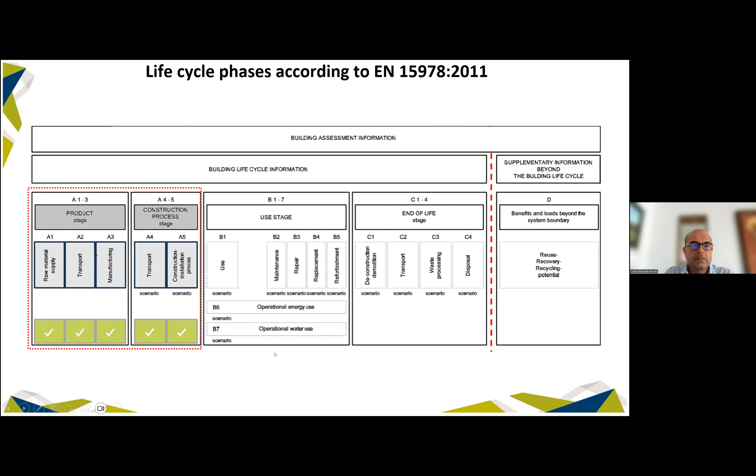So we calculate the distances. One of the elements that usually impacts the life cycle and the carbon footprint is transportation, right? So in this case, by determining the distances of the production of steel and cement, as well as the river materials, and also guadua, which in this case was estimated to be brought from Quindío, which is a department close to where we are, between Pereira and Armenia, the capital cities.

And clay brick was brought from a place nearby in the municipality of Pereira. So finally, these were the estimates according to the work done for the two typologies for each one of the houses, the one made out of clay and the one made out of guadua. And these are the emissions equivalent per each one.

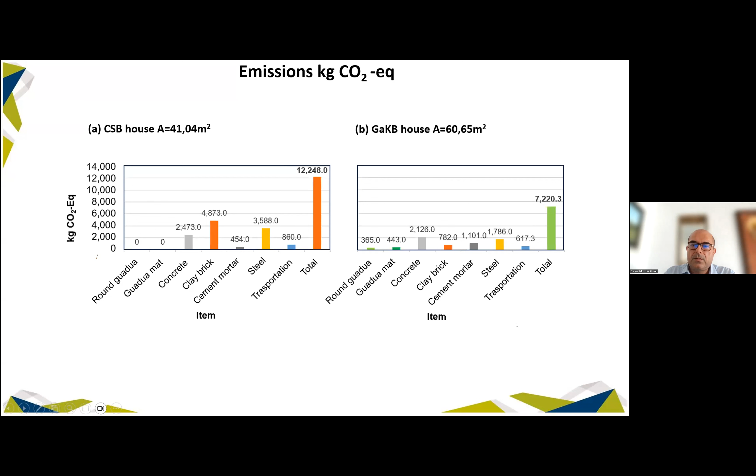For the clay house, we have 12,000 kilograms, but the area is smaller. In the Bareque house, we're speaking only about 7,000 kilograms of CO2. This is for all the house, and of course it's bigger, so we need normalization in order to transform this.

So when making the conversion, this becomes this part, and in the case of the Bareque house, it is 119 kilograms of equivalent CO2. So this is how things work. So the carbon footprint of the Bareque house is around 40% only. So in this case, we believe that this is not only sustainable building, but of course the calculations show this.

So in addition, we included CO2 captured during the growing process. The table includes the amounts of guadua that was used, and all the amounts that were used in the house. So we converted this based on some studies carried out by Professor Camargo, who's part of our university, who has systematically studied how this process is carried out.

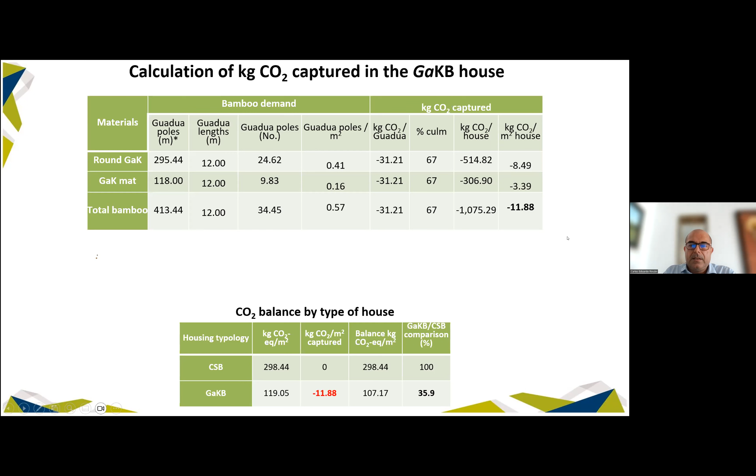So this is what we took into consideration, and our calculation reached 11.88 kilograms of CO2 equivalent per square meter in the case of the Bareque house. So when doing this comparison and seeing the CO2 footprint, we can see how 119 reduces to 107. And of course, in this case, we are not contemplating the 11.8 kilograms of CO2 that were used in this case.

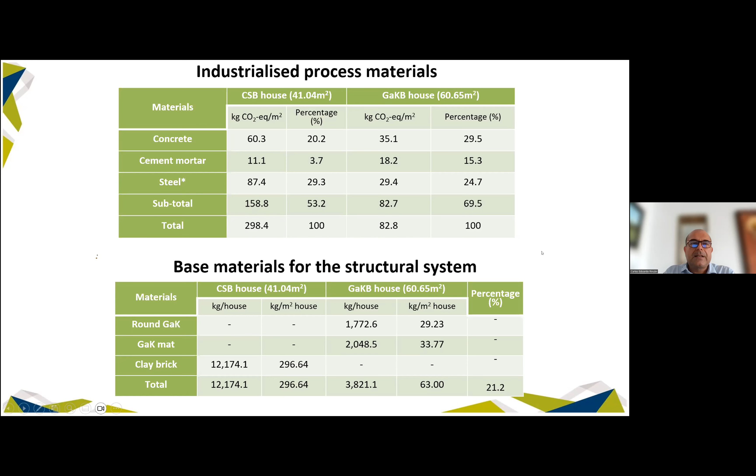So basically, this is what this is showing, and we can clearly see that neo-vernacular architecture, that contemporary architecture, is indeed efficient. These are some of the results when analyzing the differences versus industrialized materials with the use of the structural system, which once again confirms the efficiency surrounding this.

In parallel, beyond the comparison that I mentioned, because of the time I'm not going to be showing the methodology now, but we did do a different kind of analysis with a green stamp, and this has become very important in Colombia. It's called EDGE, because this is financed or enabled by the World Bank.

So national banking provides some favorable conditions for those implementing this. We can see with this green stamp what the efficiency looks like. We expect a reduction versus the baseline, which is basically conventional construction.

This is one of the most relevant aspects related to the energy efficiency of the material. We're speaking about 73.07% of energy savings that are included in the material. So this means...

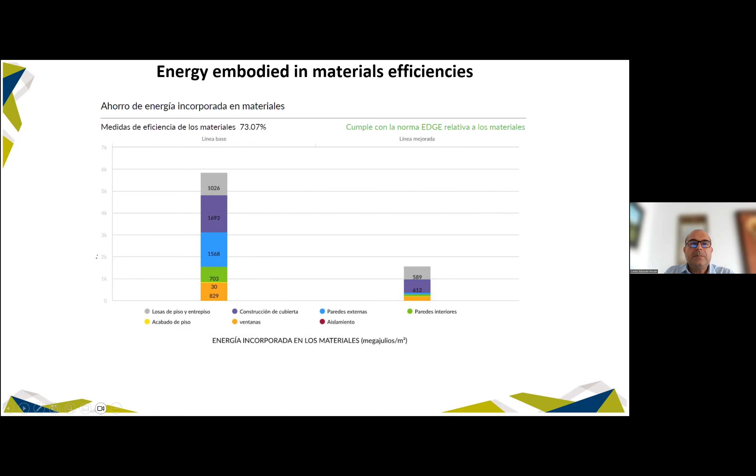This is the calculation for the Bareque house, compared to a conventional house. Even though the system has been criticized as a black box system, since it calculates using its own parameters, I believe it is significant, and it harmonizes the analysis of the life cycle based on energy savings included in the materials.

We don't want to have a single typology where everything repeats, but we want to have exploration capabilities that we can see develop over time.

In addition, there are laws or standards in place, for example a housing and habitat policy that includes cultural housing. This is an interesting message for other places.

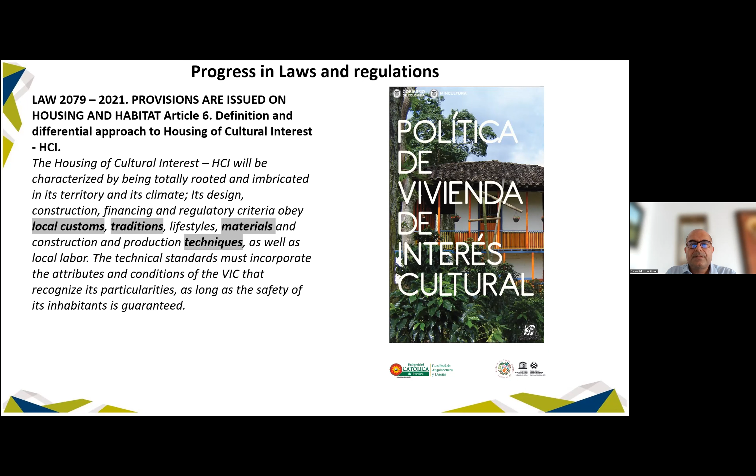I've only seen this in Colombia, where it's not only about social housing, but also cultural housing—architecture that responds to the conditions of the environment using local techniques. This is specifically what these neo-vernacular housing typologies are showing us, and what they are trying to do. It's interesting to see how this has progressed.

In addition, we have the Guadua law in Colombia, which encourages construction with Guadua bamboo. One of the articles states a very interesting goal: if this is properly managed by the state and different stakeholders, it will eventually foster the efficient use of bamboo, which would be very convenient for users.

And of course, this will be done with Guadua Bareque. The goal is that new houses built with state subsidies should include at least 30% construction with guadua or bamboo.

Even though we are aware that there is international development in the use of bamboo and guadua in the coffee axis of Colombia, there are other regions with other kinds of bamboo and guadua. So we have a very interesting field, and of course in other countries we can also replicate this.

My regards to those who helped me at different moments, and these are some of my bibliographic references. I think that's all from my side.